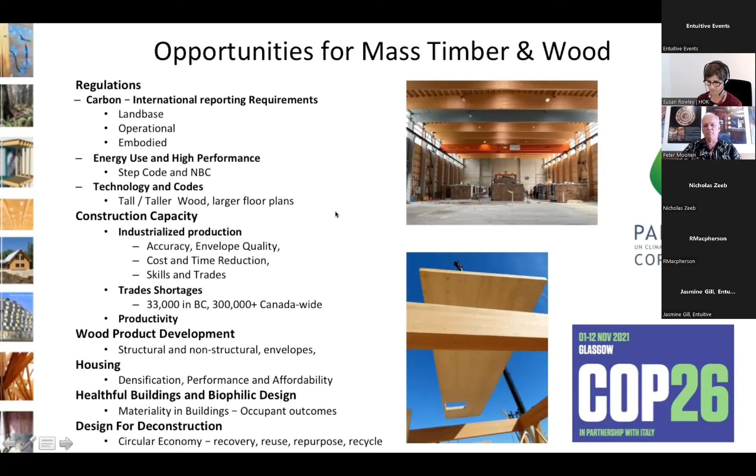One of the things that over the last several years we've been looking at is there's a tremendous amount of opportunity for wood use as codes change and as focuses on carbon change. And so these are some of the things that we regularly present on and work on. For the purposes of this session, I'm really just going to focus on these ones here. So the carbon aspect, some energy use and high performance, design for deconstruction. There are labor issues, there are construction opportunities, there's technology and stuff, but because it's the Carbon Leadership Forum, I'm just going to focus on that.

The wood industry has traditional products like lumber that have been around for generations. They're often used in single-family homes. I think more than 90% of all the single-family homes in Canada are built with these traditional products of lumber, plywood, OSB. However, some of these products have been advanced so that the codes have changed to allow them to be used in other buildings. And I'm thinking of things like mid-rise construction, where you can have light wood frame up to 6 stories across the country in the National Building Code.

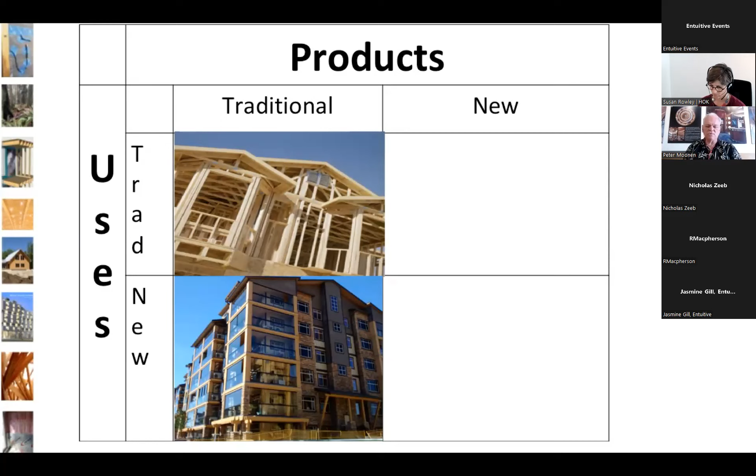The National Building Code, and we'll get into this a bit later, is changing to allow encapsulated mass timber construction, but these traditional products that we have, the light frame structures, can be used in buildings up to 6 stories and can be used for tall wall systems. They can be used in offices, schools, that sort of thing. But there are some new products. CLT is one of those. I'll get into what the mass timber products are, but CLT is one of them.

And they can be used in traditional buildings like this office building, which happens to be the building I'm in right now, a 2-story office building, similar to a lot of those medical buildings and small service buildings, mercantile on the bottom, offices above. And then there's some new products. This particular one shown there is wood fiber insulation.

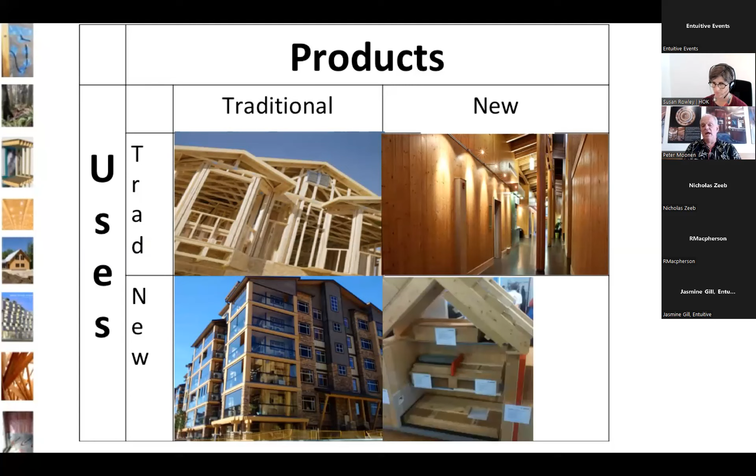And these new products can be used, as I say, in traditional buildings, as well as new construction and new technologies. This is the Origine building in Quebec City, and this is the building completed. And it's an all mass timber structure. So there are opportunities for these different products, as we will see.

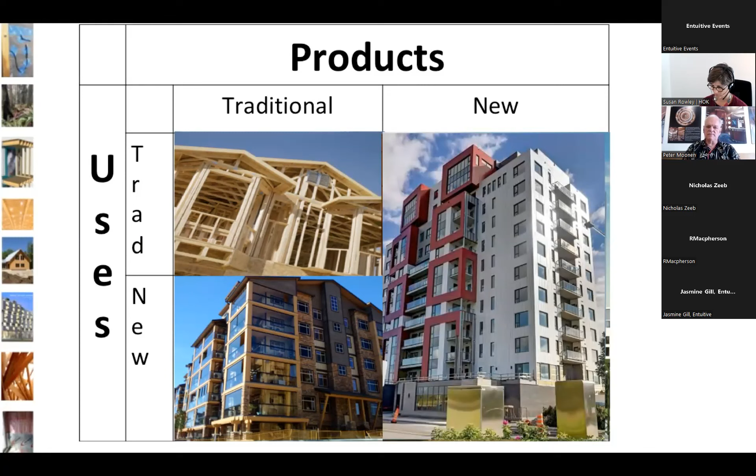So typically, the heavy timber or the mass timber has been raw lumber, not using glue. These are the hammer beam design in a cathedral, several hundred years old in Europe. But the pictures on either side are from buildings that are old, but heavy timber and mass timber. The one on the right, for those of you who ever get out to Vancouver, there's a pub called the Gastown Steamworks in the Landing.

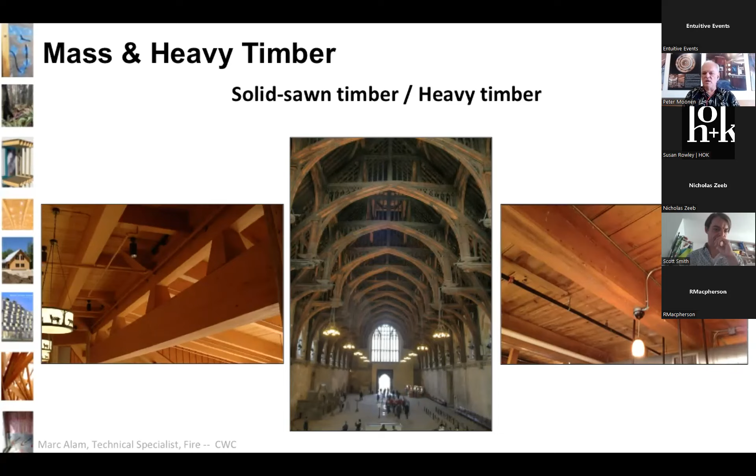It's a 9-story building that is actually closer to 11 stories in height, but it was made with heavy timber, solid Douglas fir columns, and that nail laminated timber deck. So we've been resurrecting the fact that we forgot that we knew how to build tall wood buildings using heavy and mass timber. So I just showed you some nail laminated timber. I'm just going to go through these quickly.

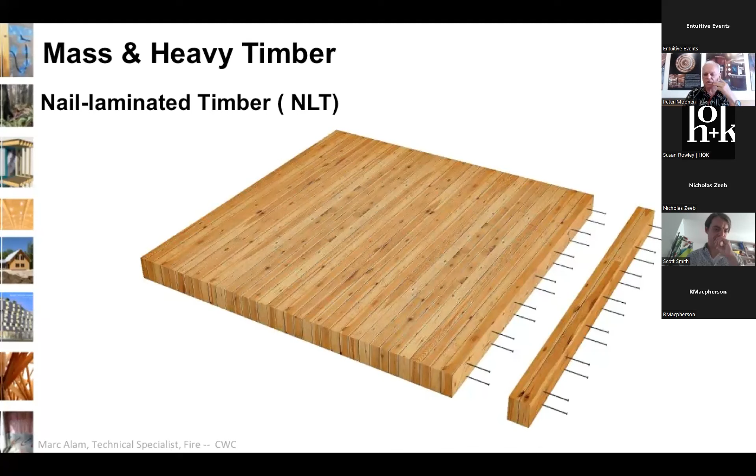The nail laminated timber is simply dimension lumber that is nailed together with nails that go through 2.5 of the members, so that they provide support in one direction. So if it's a span or a single directional cantilever, this is a very cost-effective way to do it. It's simple. Oftentimes it can be built on site. Other times it's manufactured off-site, delivered.

Glue laminated timber, I'm pretty sure everyone's familiar with that. It is using chemical means to fasten the members. It's a very efficient use of wood. And consider that these glulams here would probably be 3 or 4 lamella thicker if it was a solid wood beam. And that's because these little defects here, these knots and stuff, are offset by wood on either side of that particular lamella. So from an environmental perspective, you're getting greater efficiency of smaller trees.

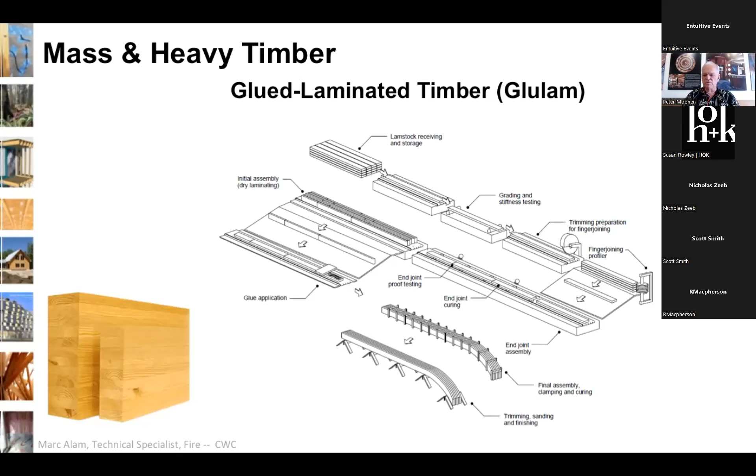You're able to use smaller members and build that up into a heavy timber structural product that is consistent in strength and consistent in cost and dimension, and it's a much more stable product. So dimensional glulam timbers have been used for 70, 80 years.

Laminated veneer lumber, this one is using the same veneers as are used for plywood. It's a peeled process. The veneers are about 1/8 of an inch thick, and then the resin is a phenol resorcinol resin that does not off-gas. A general rule of thumb for off-gassing, if you're concerned about that, is if it's a structural veneer used, it must be waterproof, and it must be structural from the minute it leaves the plant. So in these products the glue is inert, does not off-gas, there's no chemical changes. That's just a rule of thumb.

Laminated veneer lumber is not an extruded product per se, but it's made in a continuous sheet, can be purchased in lengths up to 64 feet long, which is the maximum length on some of the trucks, but it's typically sold in narrower bits and is used for headers. It can be used for columns and beams. It's a very efficient use, again, of wood, which reduces the overall impact because you get higher utility.

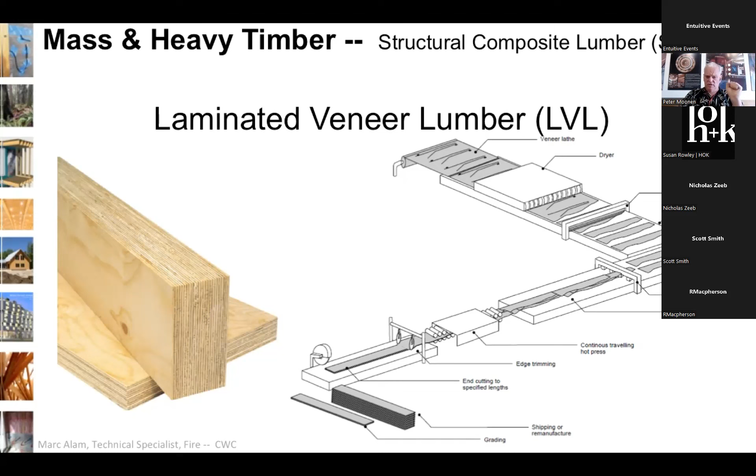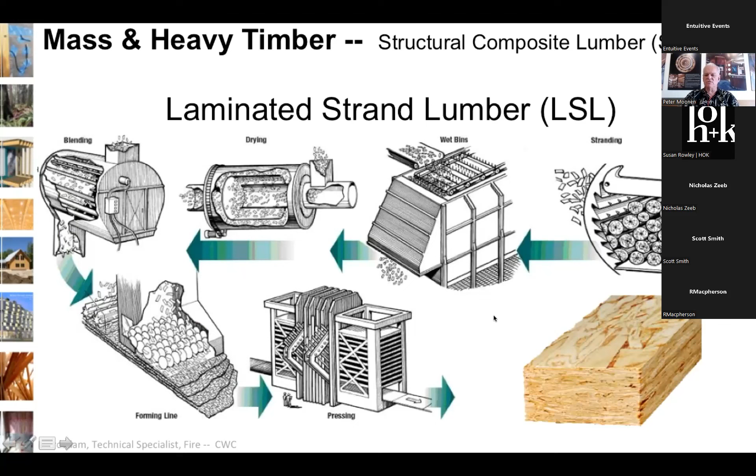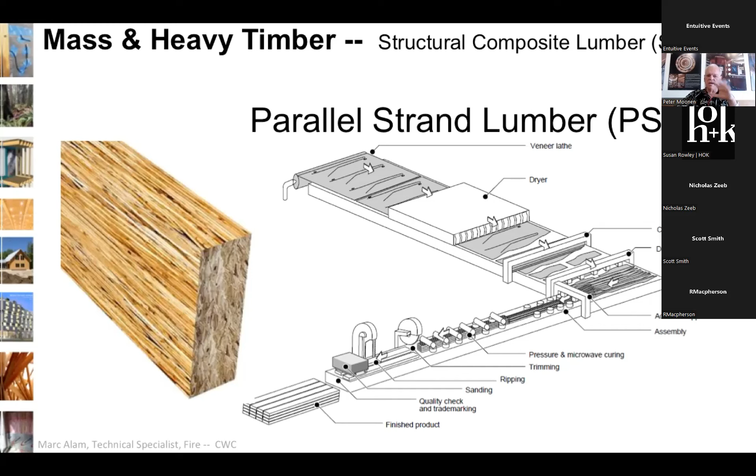It is used as a column or a beam, and it's the strongest engineered wood product we currently have in the world. It's about 6 times as strong, but rated at about 3 times as strong as a solid lumber component. A couple of others that are new to the market: dowel laminated timber.

Instead of using nails, which would hamper post-installation modification, or glue, which requires curing time, it uses wood dowels. The wood is laid up just like a nail laminated timber, pressed, and then holes are drilled, and dowels that are a little bit bigger than the hole are pressed in place, and it locks the timber in place. The nice thing is, because these dowels are just every few centimeters, you can machine doors and window openings without worrying about hitting nails.

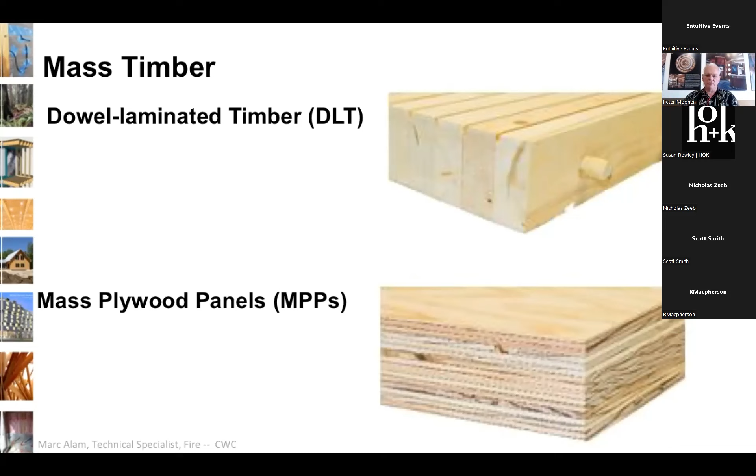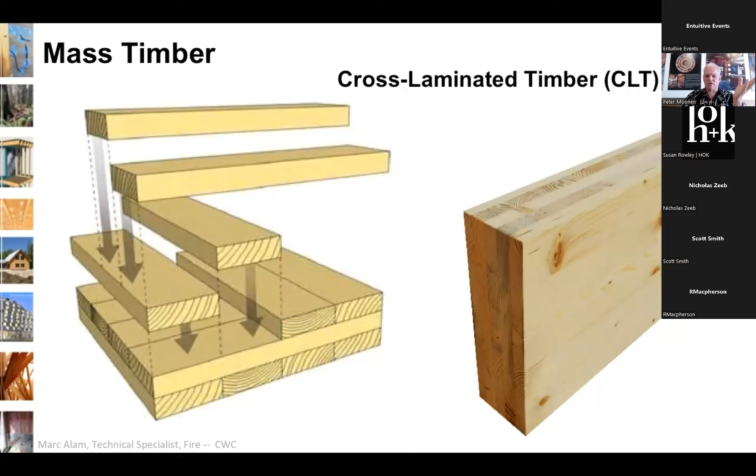And another product that is not made in Canada but is available in Canada are mass plywood panels, where they use 3/4 inch or 1 inch plywood. They build those sheets up to create a very strong and very durable mass plywood product. And the one that seems to be garnering a lot of attention these days, cross-laminated timber. I'm going to leave that to Corey. Corey, you can explain that process. I'm not going to get into that because we've got an expert on the presentation.

So, what are some of the considerations around forests and carbon and wood? Well, I'll take you through these, and then we'll discuss them as I go through. First of all, there's forests. We have logging operations. There's concern around harvest levels, and there's also what happens on the land base after the harvest. Do emissions increase? Does the land get replenished? These are all concerns that people have, and for the most part, once you do the research, you realize that there are impacts, but these are being addressed. For example, in Canada, most of the wood is owned by Canadians. So these are some of the issues around forests.

There's also embodied carbon. What goes into making the products that we use? How much energy, how much carbon? This is all being addressed through life cycle analysis, and it's something that you as carbon leaders recognize is an important part of our considerations, that we can't just ignore what goes into the building. We have to focus on that as well as the operational performance.

Biogenic and stored carbon. This is a bit of a wild card in that wood is a biogenic material. It comes from nature, and it's going to go back to nature. The certainty of that is we know that it's going to go back, but we don't know when. So if it went back to nature the day after we used it, it would have 0 carbon benefit. If it goes back in 100 years, that's deemed basically to be permanent carbon, and we would get 100% credit. So we'll talk a little bit about that. If you've got any questions, perhaps I can answer them.

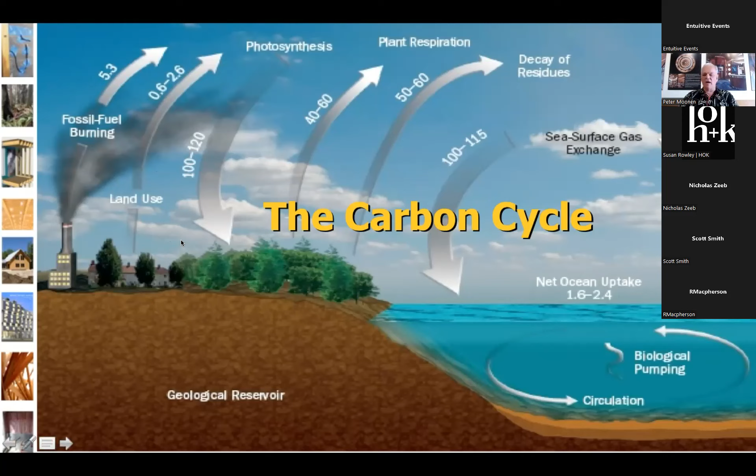So I'm pretty sure most of you have seen something like this, the carbon cycle. Humans, nature, whether it's wildfires, disease, decay, landslides, hurricanes, affect what happens on land and put carbon back into the atmosphere, and then forests and land and ocean take it back out. So the concern that most of us are facing is not part of the cycle that we had, and we're adding carbon into the atmosphere. How do we address that?

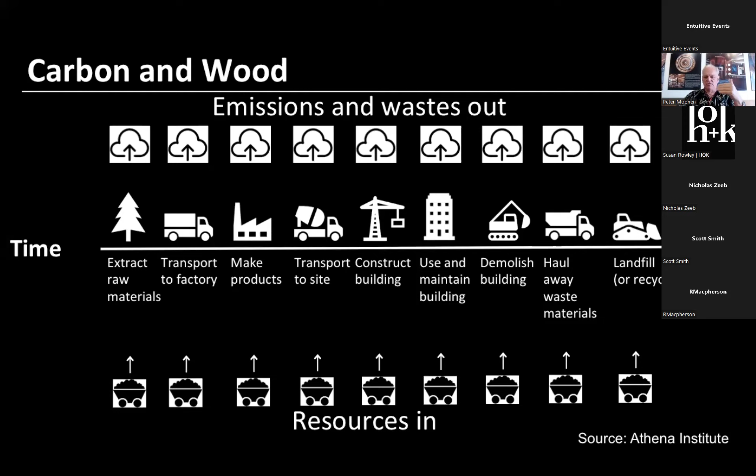So again, for those of you who are doing LCA, you're familiar with the A1 to A4 elements of life cycle analysis, looking at inputs, looking at outputs, looking at residues or waste. Where do they go? How do they get used? And what's the impact? The wood sector that I deal with is looking at the extraction and transport and manufacturing of products. That's the embodied impact. We don't get involved so much on transport to site. That's going to vary with location.

It's going to vary with product. It's usually by truck or rail. We also don't necessarily get involved in the construction process, but we work with architects and engineers to create some efficiencies and value engineering of products and use of those products. So there's a carbon impact to value engineering, if we don't have to use stuff that is either high carbon or as much of a material.

And I'll give you an example, and Nick, no disrespect, if someone is looking at the impact of building a light frame home or a CLT home, the CLT home will sequester more carbon, but has a higher embodied impact. So we have to balance what is the ultimate impact that we want to achieve or want to reduce, and pick our materials accordingly. And this is within material silos like wood, and also across material silos like stone and masonry, wood, steel, and concrete.

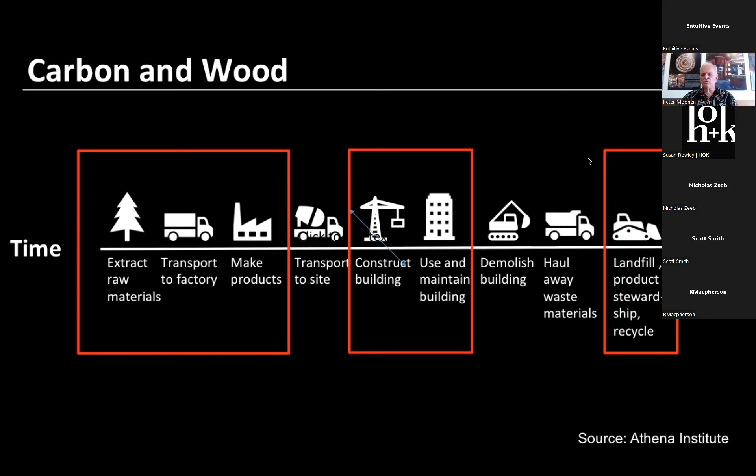So the wood industry doesn't get involved in demolishing buildings per se, although there are some codes and standards we've been working on for designing for deconstruction. We'll get into that later. And then at the end of the day, what happens to that product when we no longer have a use for it? We've fully recycled, we've recovered, we've reused, and it ends up going to the landfill. So we have to address those. Those are the areas in the red rectangles that we deal with.

One of the programs that I'm overseeing for the wood industry is the National Research Council Low Carbon Assets Life Cycle Analysis project. And what we're doing is gathering information from all the sawmills, plywood plants, OSB plants, mass timber producers, to provide the National Research Council with a life cycle inventory database. It's very comprehensive, it's very complex, it's going to take some time. We hope to have it all done by the end of March.

NRC, or National Research Council, has provided support to the concrete industry as well, and then they approached us. We'd like to get this information from the wood sector. So we'll be gathering this embodied impact information, the first parts of that, so that designers and procurement people within government are going to be using this to add to their decision-making process. So this is a procurement strategy by the federal government that is likely to be used by the provincial and municipal governments as well.

So that's this extracting raw materials, transport, and making products. That's what the LCA squared is, and we hope to have that data. It will be available to any designer. So if you're a designer, an architect, engineer, or a contractor, and you want to say, I want to find out the material choices between, say, a truss or an I-joist or a built-up mass timber, you'll be able to calculate those embodied impacts.

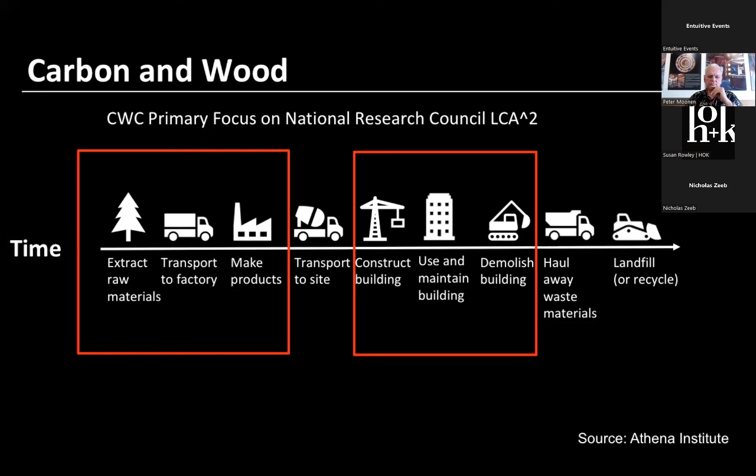So forests, it all starts with forests, and you've probably heard of sink, sequester, and substitute. It actually starts with sustainable forestry. And I think that's really important because in Canada, most of our forests are owned by Canadians. 93% is owned by us, not by companies. In fact, we also have a very high level of certification. Canada's certification is about the equivalent of the next 8 countries or 7 countries combined.

So the vast majority of our forests, and our forests account for about 400 million hectares in the country. 300 million could produce wood, and about half of that is certified. 164 million hectares are certified under one of 3 different systems.

Another thing that's going on is the National Research Council and Canadian Forest Service are looking at forest management and how that can be used to mitigate climate change, which is basically pulling carbon out. So they looked at a whole bunch of different methodologies. They looked at bioenergy. If we convert to bioenergy, what does that do? We looked at longer lived wood products. We looked at harvesting less or better utilization. I talked about taking small trees and making glulam.

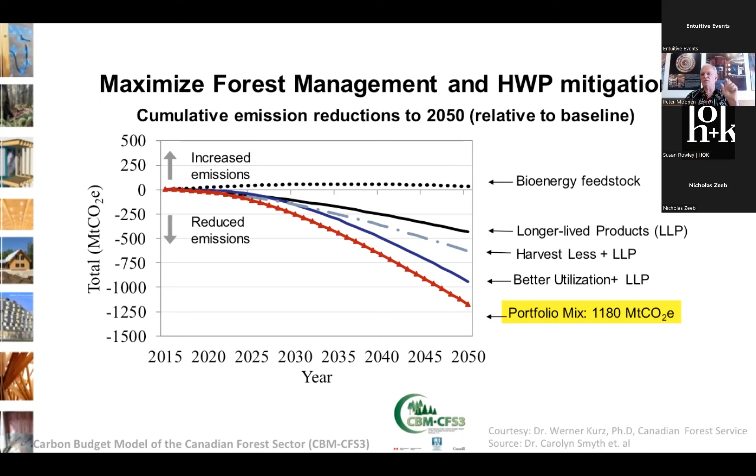And what they found is that there's no silver bullet, there's silver buckshot. So we have to do a little bit of everything if we want to optimize the carbon benefit from our forests. So there are people who say we have to use wood for everything. There's others who say let's just convert fossil fuels. Others say let's just lock up our forests and do something else. When you look in balance at what is best from carbon, it's a mix. It's conservation, it's utilization, it's better management, and it's also using wood in longer lived buildings.

When we look at the forest carbon, typically a forest will achieve a stasis where in some of the very old forests, they're losing as much carbon as they are absorbing. So you get to a net zero. It's a carbon stasis, and over time that remains static. There are some big trees that hold a lot of carbon, but a lot of trees that stored carbon have also died. So there you get the stasis.

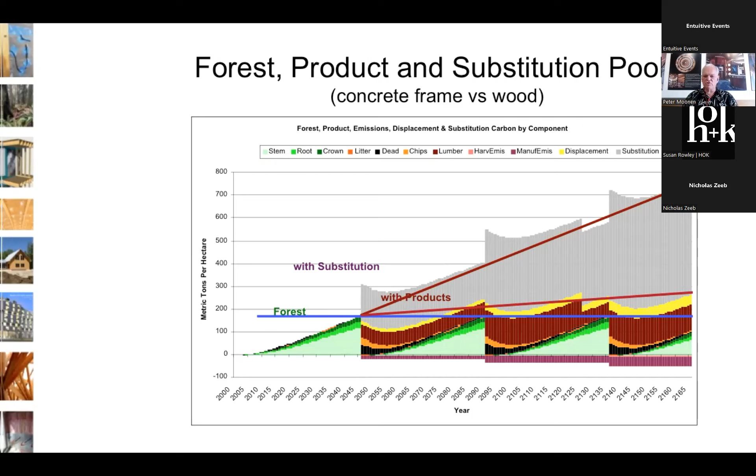When you take some of that and you lock it up into longer lived buildings and structures, you're actually able to store that. So you're getting a little incremental benefit. But also, if you use it then to substitute where you can for other products, then you get the displacement of those emissions. Now, I want to say there's no perfect material. Steel rusts, concrete spalls, wood burns. But what we as users and designers have to do is understand how do we integrate these products to better reflect what we want to achieve in cost, in function, in beauty, in performance, and embodied impact.

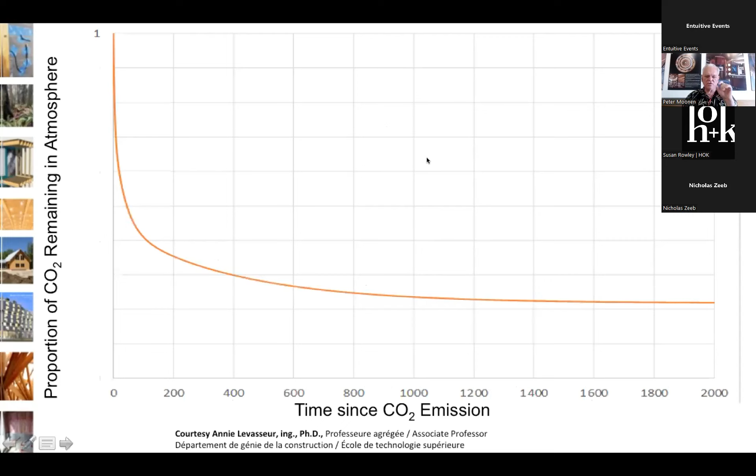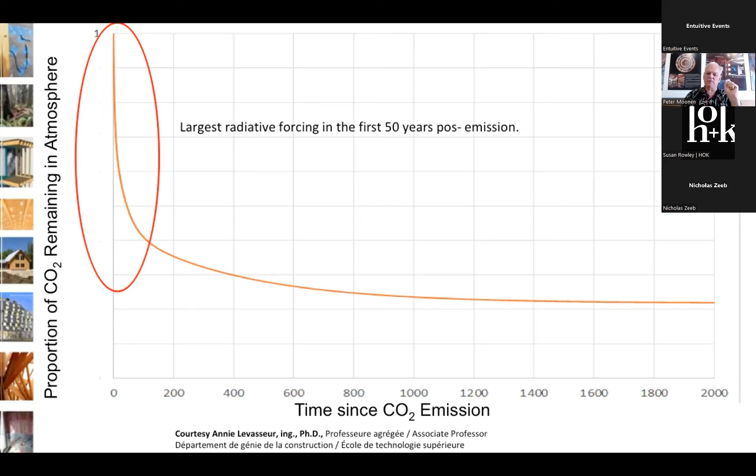Time is a very important factor when you're considering carbon. If you look at this chart, this is showing the radiative forcing of a CO2 emission. The largest radiative forcing is in the first 50 years post emission. So that means that if we can delay those emissions to a time perhaps when we're better able to adapt or find ways to mitigate, we have to understand that. So when you emit is important. In fact, if you avoid a ton of carbon today, you don't have to avoid over 4 tons of carbon in 80 years. That's the cumulative benefit of an avoided emission.

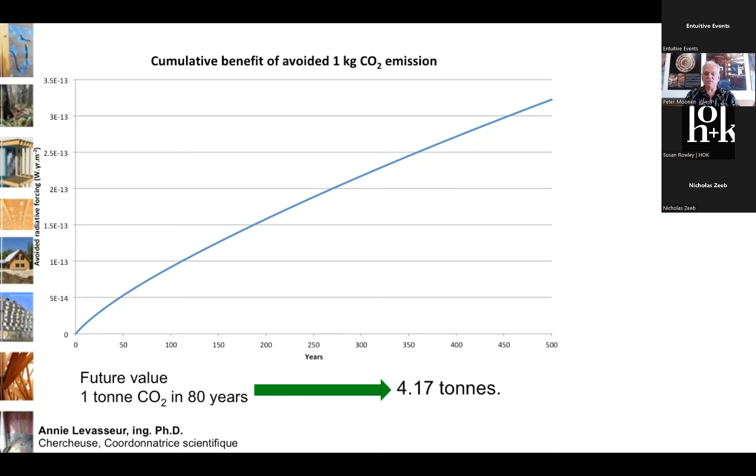So there's justification for including the sequestered carbon in a building. And the longer that building retains its carbon, the greater the benefit over time. But as I said, if you build a building and it gets destroyed the next day, all of your embodied impacts have still occurred. Likewise, since materials do go back to the atmosphere, it's not a 100% permanent storage. So the carbon benefit of sequestered carbon is somewhere between 0 and 100%. That may seem glib, but that's what we have to figure out.

At the end of the day, though, the IPCC has recommended that we need to use our forests, use wood from sustainable forests and use them in longer lived products. And that will generate the largest sustained mitigation benefit. And this was validated again in 2013 and 2019.

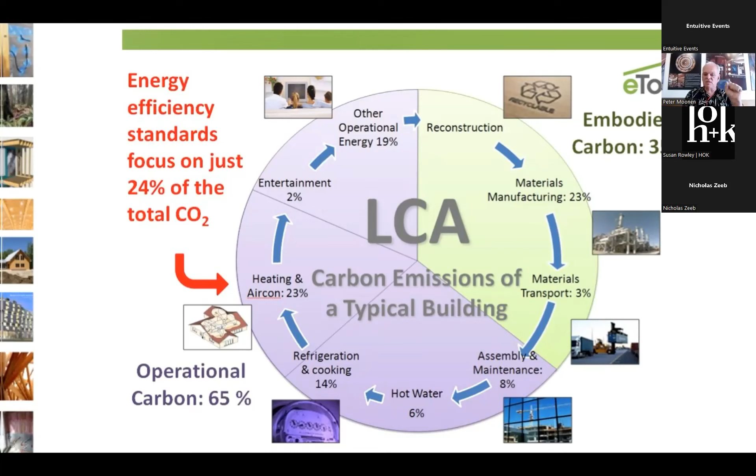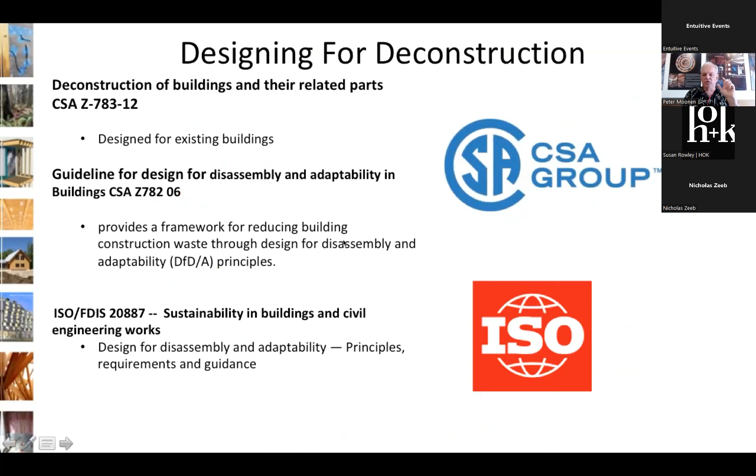When it comes to extending the life of carbon in buildings, we need to design for deconstruction. We can't just get tired of a building and knock it down and try to salvage what we knock down. So there are some codes and standards that we have been working on at CWC for disassembly and adaptability, for deconstruction. We need to shift our thinking to designing for the future and future reuse, not just the first time single use. And there's a lot of benefits to that.

There are carbon benefits, there are cost benefits, there's landfill benefits. We've got local economy because it's always going to be deconstructed by local people. So I think if we can start to pay attention to designing buildings so that they can be deconstructed, then we're going to be better able to fulfill some of our aspirations around circular economy as well. The circular economy...

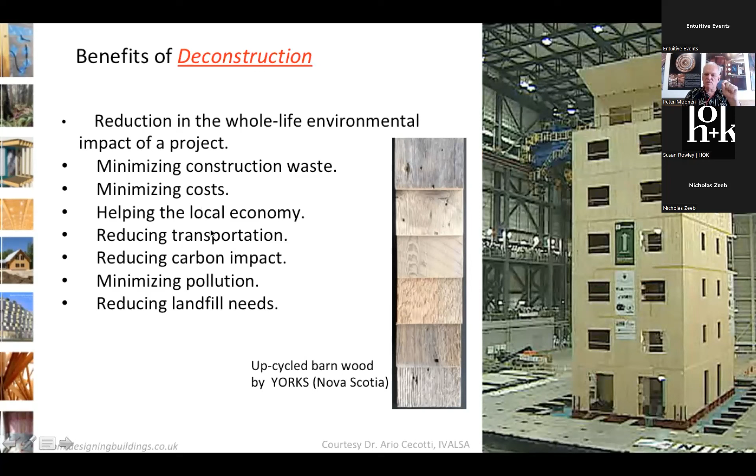...just the material itself. The other thing we need to do is we need to design and build buildings that will last. And one of the best ways to do that is to make a building that people love. Wood is often criticized: oh, it rots, it burns, it's not very strong. Well, that's our fault. If we design something so that it will fail, it will fail. We need to understand that materials don't fail people, people fail materials.

And if we design a building that is adaptable, flexible, enduring, can be maintained, is resilient, and can withstand the environment in which it is built, we're having a long-term carbon impact. And I think that's a shift. We can't let our egos or our economies drive just the carbon decisions.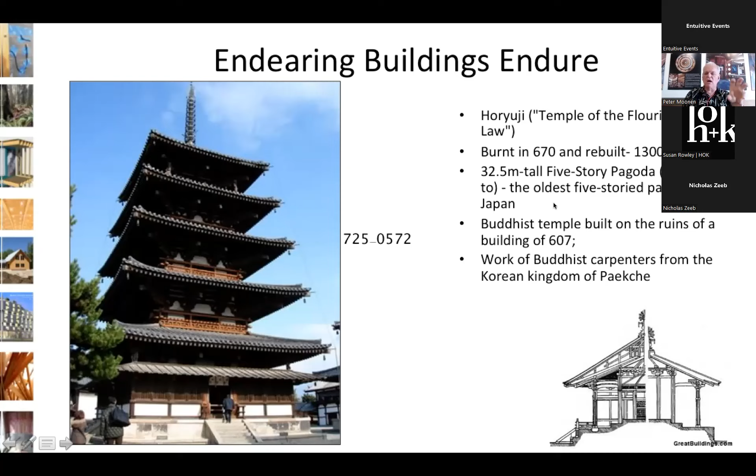I'm often asked why we would build with wood. And I think, well, gee, we've got a product that's a carbon sink. They're renewable, recyclable, reusable, organic. The forests clean the air and provide habitat, recreation, oxygen. It's all of these good features. So the question I would ask is not why wood, but perhaps if not wood, what?

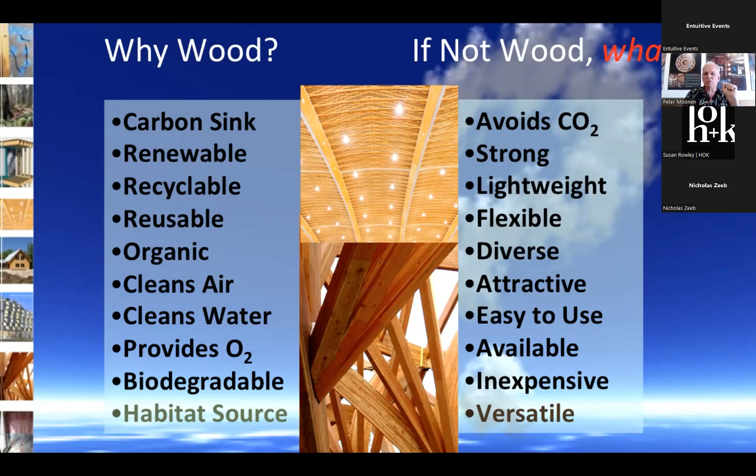If we're going to build, can we increase the amount of wood we use to fulfill what we want for that building? It doesn't mean that you're building a building only of wood. And there's a picture in Nick's presentation that has an igloo. That's the only building I can think of in Canada that's built with a single material. All the rest use more than one.

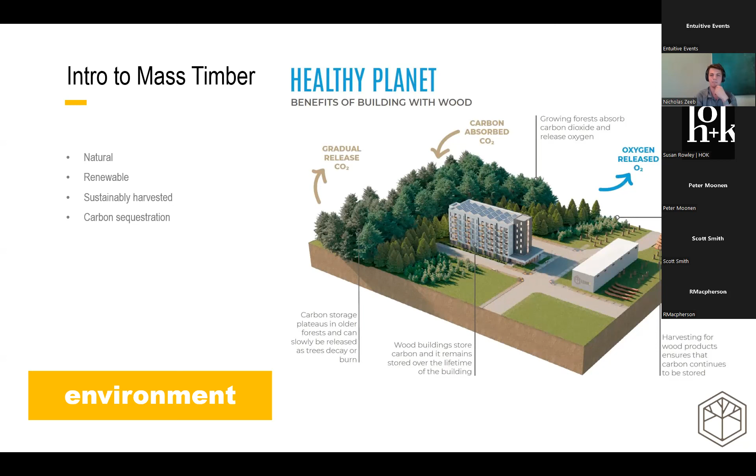The benefit of this process is that the carbon footprint of mass timber is often much lower than a concrete or steel alternative. Finally, it should be noted that the carbon from the trees is stored in the building for the life of the structure, again, something that Peter discussed in depth in his presentation. However, it's important to consider the strategy of what we're going to do with that wood after the building life cycle has been completed, so we can keep those carbon emissions out of the atmosphere as long as possible.

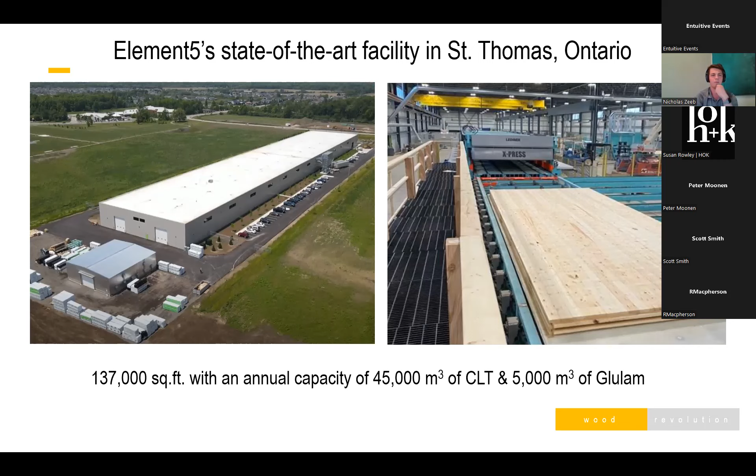We have an image here of Element5's state-of-the-art facility in St. Thomas, Ontario. It's a big box building that's about 137,000 square feet with an annual production capacity of 45,000 cubic meters of CLT and 5,000 cubic meters of glulam. We're PRG 320 certified, and we were in full production starting April 1st. The image on the right was the first panel that came off our line in December of 2020, and they've been rolling off the line like hotcakes ever since. Our wood is sourced from Ontario forests, and that wood is FSC certified.

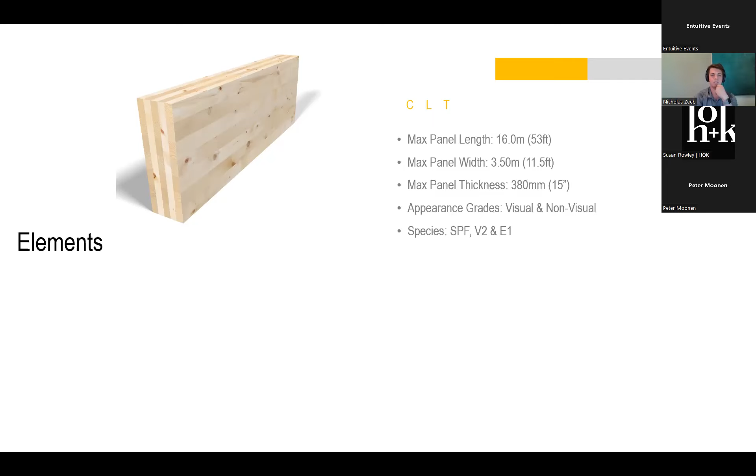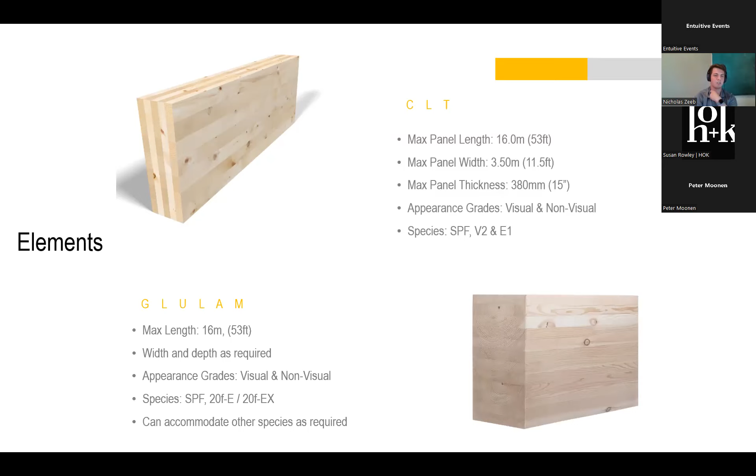So I'm going to do a quick rundown of the elements that we produce. I already mentioned that we make CLT. The maximum size of CLT panel we can make is 16 meters by 3.5 meters. That's some of the largest mass timber panels that can be produced in North America. We produce the species grade spruce pine fir, at a V2 or an E1 grade. We also produce glulam, with a max beam length of 16 meters. The width and depth are as required for the project, and the species that we manufacture is SPF, 20FE, and 20FEX.

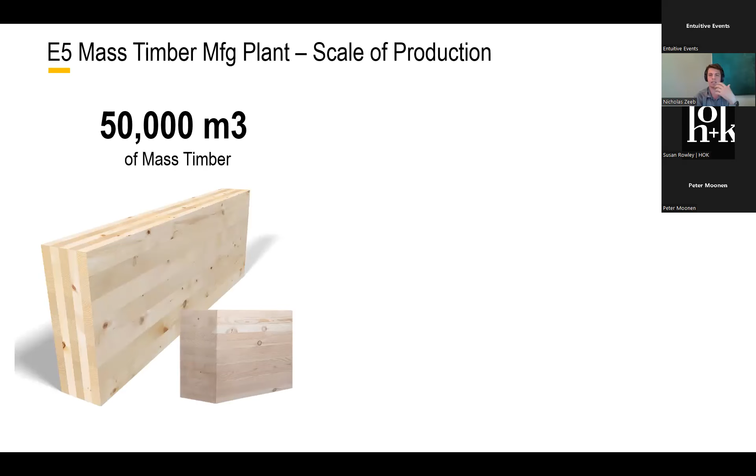So now I'm going to dive into a little bit about the scale of production specifically for Element 5. So I mentioned some numbers earlier that I think require some additional context. If we take our annual production capacity of 45,000 cubic meters of CLT and 5,000 cubic meters of glulam, that adds up to 50,000 cubic meters of mass timber production out of our St. Thomas facility annually. Now, when I first heard that number, it was hard to understand what that meant in terms of actual construction. So that is roughly equivalent to 22 Brock Commons buildings produced annually.

Of course, this got me very excited the first time I heard it. That's a lot of mass timber that can be built. And I really saw the potential for what Element 5 could do for the mass timber industry in Ontario. But before we get too excited, I want to zoom out a little bit and really consider what 22 Brock Commons buildings really sounds like at the end of the day.

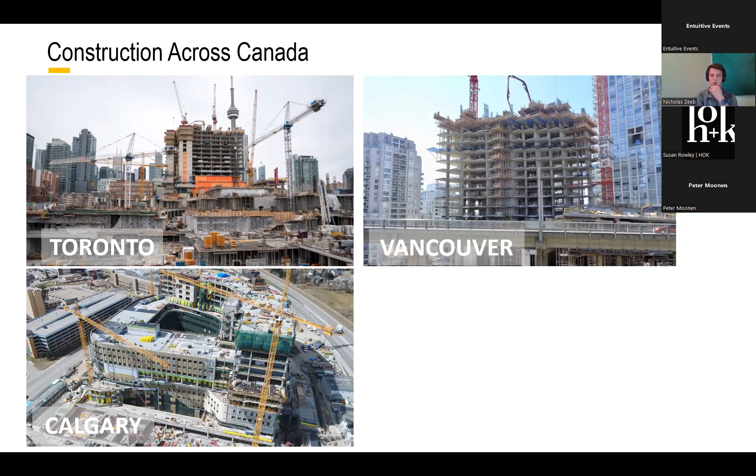I'm assuming a lot of people on this call, we're doing this for the CLF Toronto chapter. I'm assuming that most of you are in Toronto, but I'm sure everyone is well aware of the immense construction going on across Canada. So, quick Google search got some images of various construction projects going across Canada, Toronto, Vancouver, Calgary. And as can be clearly seen, we're really pushing forward with urban development, with concrete and steel clearly being the material of choice.

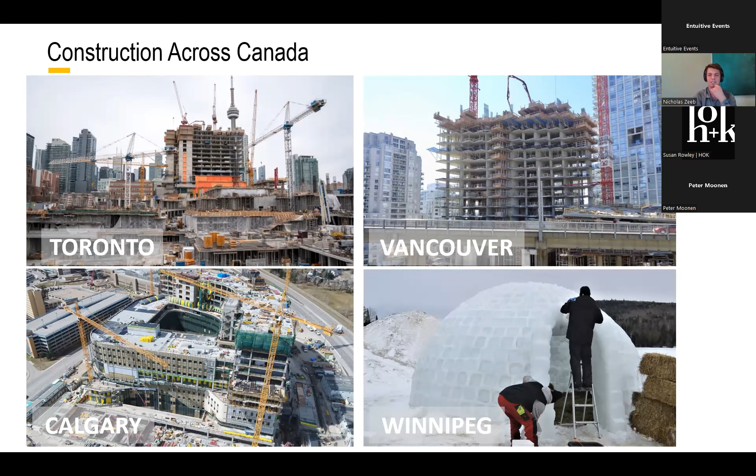The only major city I could find committing to sustainable construction was Winnipeg, continuing to harvest building materials from the frozen tundra. It's important to realize, though, that even Winnipeg will not be able to follow through with sustainable construction once climate change kicks in and starts to impact their ice reserves.

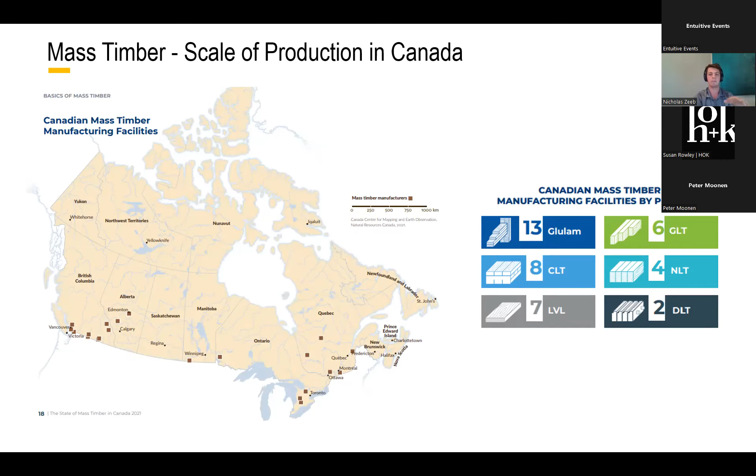All kidding aside, mass timber production in Canada, of course, is growing. If we look at this map from NRCan, there's clearly lots of growth in the industry, with most of the competition existing in glulam and CLT. And it's exciting to see that there's so many manufacturers across Canada. But again, I do want to take a step back and really understand what this scale means compared to our competition of steel and concrete.

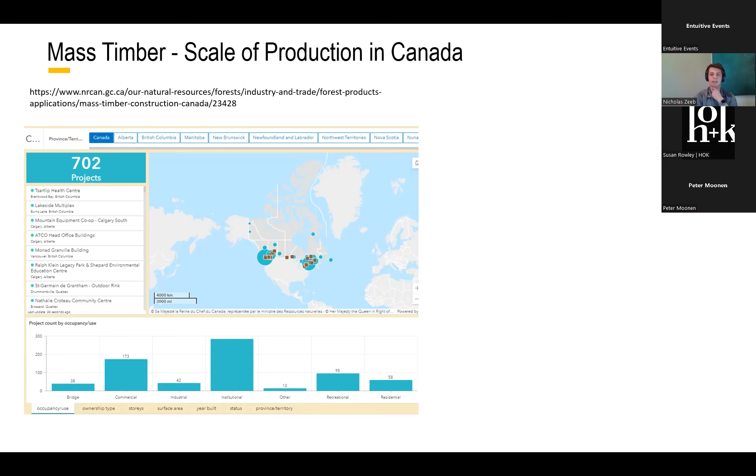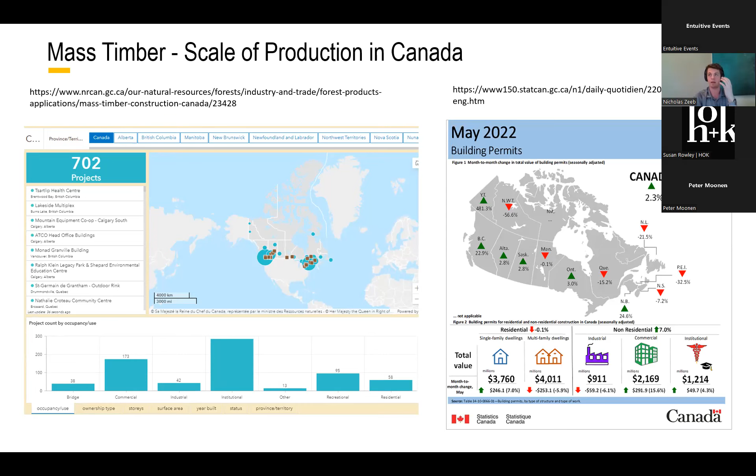However, if we look at the value of building permits across the country in May of 2022 alone, there are billions of dollars of construction happening across the country. 700 new projects, while a great amount of growth for the mass timber industry, is ultimately a drop in the bucket. Now, if we can take this even just one step further and look at the scale of production globally, by 2025, it's anticipated that the global production capacity for CLT is somewhere between 2.5 and 2.8 million cubic meters of CLT.

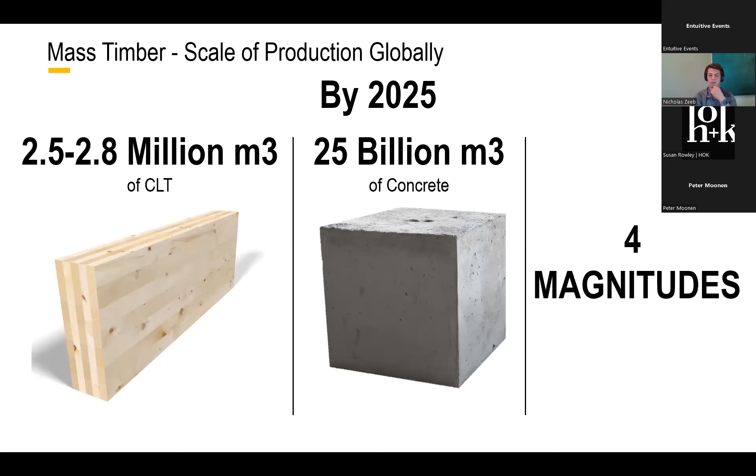If we compare that to concrete, though, it's expected by 2025 we'll have 25 billion cubic meters of concrete annual production capacity. I know we can't necessarily say that 1 cubic meter of concrete can be replaced by 1 cubic meter of CLT, but it is important to note here that that's a 4 orders of magnitude difference, which is quite a large way to go to be a truly competitive building material. And so if we consider the adoption of mass timber across Canada and effectively across the world as an S curve, we are very much likely still at or before the inflection point of major growth and adoption.

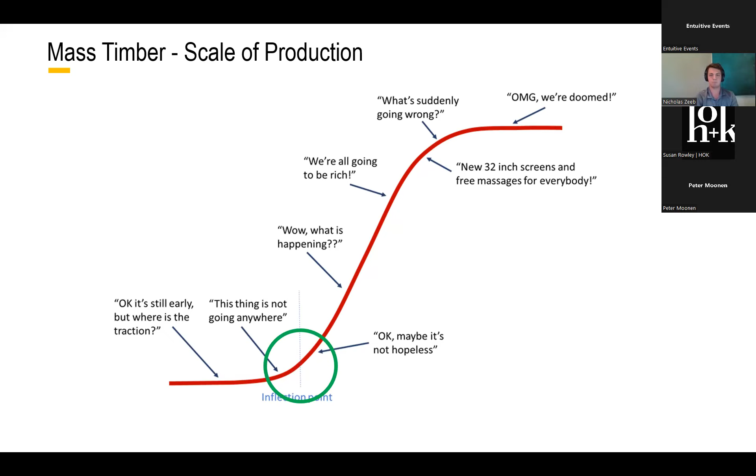Now, I bring all these points up not necessarily to bring doom and gloom and be nihilistic to these carbon discussions. In fact, I think that having this perspective is incredibly important to make sure that we focus the industry and help mass timber grow in the best way possible for what it's effectively able to be used for. So therefore, given that perspective, I want to point out some things that we need to consider.

While mass timber is a great solution to lower the embodied carbon in a structure, we simply cannot put all our eggs in that basket. Other solutions need to be explored, particularly for building typologies where mass timber is not practical, or there's heavy code limitations like for buildings over 12 to 18 stories.

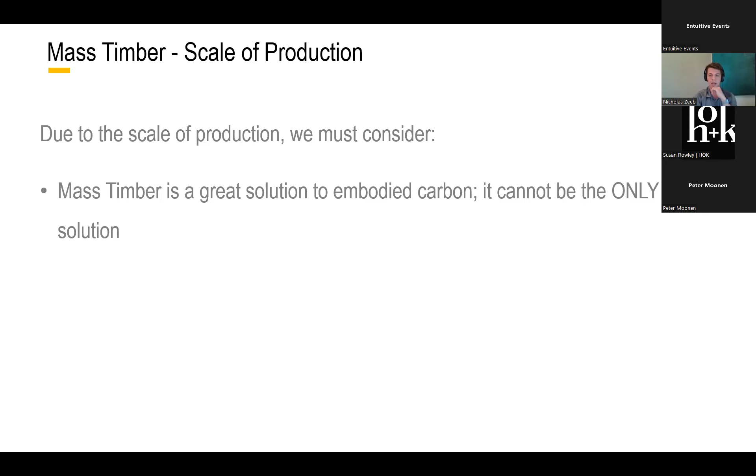The other point I want to make is that investment in mass timber buildings and mass timber production needs to happen across the value chain, still in droves, both from governments, owners, private developers, designers, engineers. All of us are required to keep accelerating the pace of mass timber industry so it can truly become more than a drop in the bucket.

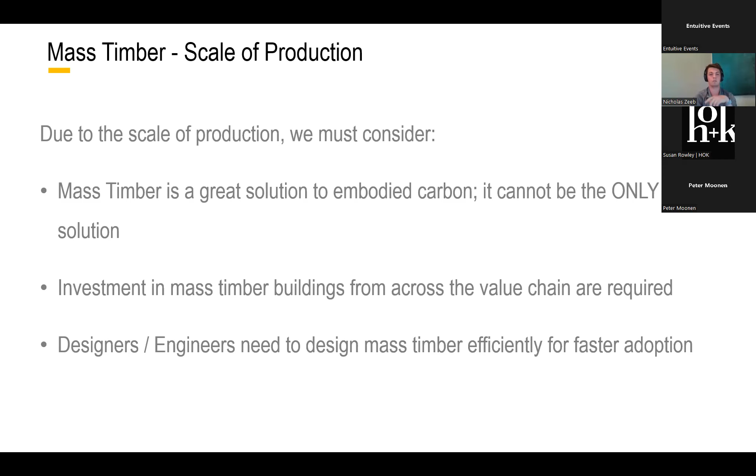And the last point I want to point out is that designers and engineers, in order to further push mass timber as an industry, need to clearly understand its limitations to ensure that the structure is designed efficiently to bring down both cost and also to bring down embodied carbon to encourage faster production.

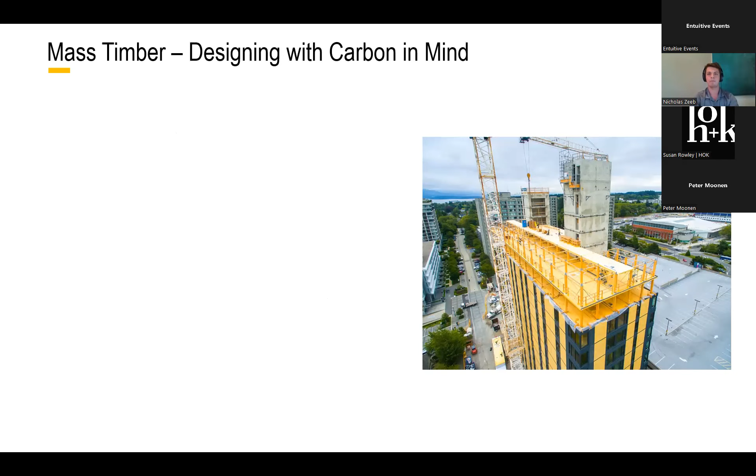Okay, so that brings us into the last segment of the presentation, designing with carbon in mind. And so where should we focus? There's a couple points that I want to bring up, specifically that the volume of wood in the final structure can be considered to be directly proportional to the embodied carbon and the cost of the building. And we're going to go through these points one by one in future slides.

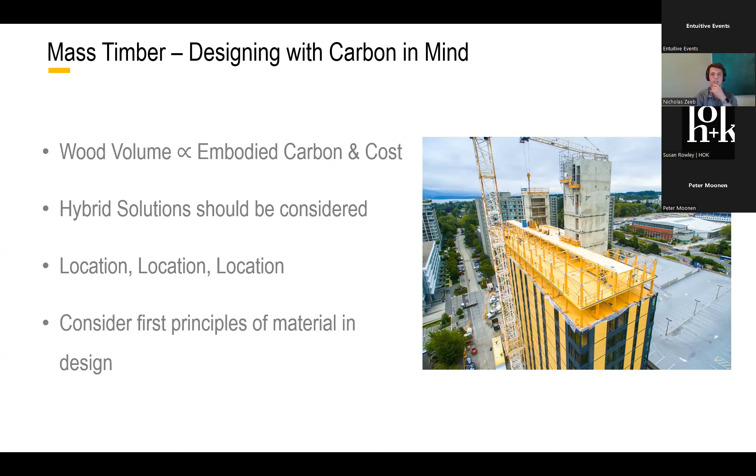The next point is that hybrid solutions should be considered wherever possible, where mass timber as a sole solution does not make practical sense. Peter did note that we typically don't discuss location in terms of the embodied carbon, but I'm going to. I think location is an important thing that we need to focus on when considering the output of carbon when building, specifically with mass timber. And then the last point we're going to discuss is the first principles of mass timber manufacturing and how that impacts construction.

So starting in that first point, where wood volume can be considered directly proportional to embodied carbon and cost, this is an example of the different layups that I pulled directly from Element 5 specifications. And I want to focus on the simple fact that CLT is generally comprised of a discrete number of odd layers, specifically 3, 5, 7, and 9 layers.

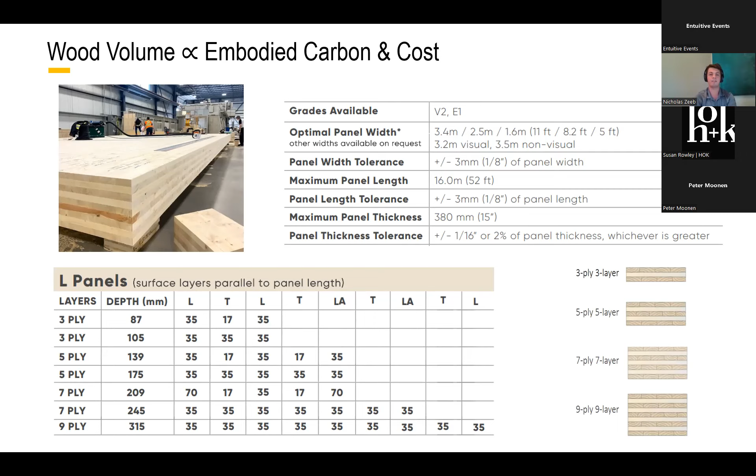I point this out because for that reason, CLT is unlike concrete, where it's not unheard of that if you are at your capacity limitation, you can just add additional rebar or increase your slab thickness by 10 millimeters to achieve those capacity requirements. With CLT, if you design a building that goes over the capacity limits of that panel thickness, you then have to consider potentially adding 2 additional layers of wood to meet your capacity requirements.

Let's go through an example of this with Element 5's span tables, which are provided on our website. So let's say we're in the first category of this table, designing a residential building with a 1.9 kPa live load. In this case, we're typically trying to make a 5-ply 175 panel work, which is our most cost-effective and relatively simple to design to. In this case, the panel is governed by vibration at just over 6.1 meters. If, unfortunately, the panel clear span goes beyond that span limitation, then we have to start considering design alternatives.

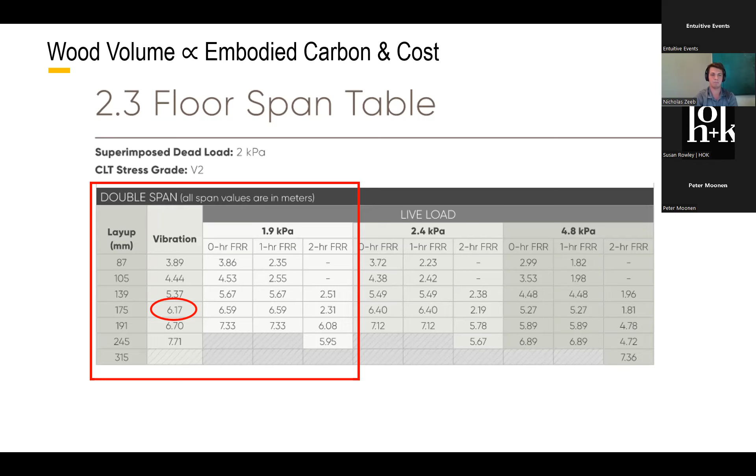The first thing that we're going to do is consider, can we go from a V2 grade panel, which is what this table is based on, to an E1 grade panel. That's the next strongest grade up. But if even going to the next grade doesn't get us the capacity that we're looking for, we then have to consider going to a 7-ply panel. We would typically recommend going to our thicker lamella counterpart for ease of manufacturing, which is the 245 panel.

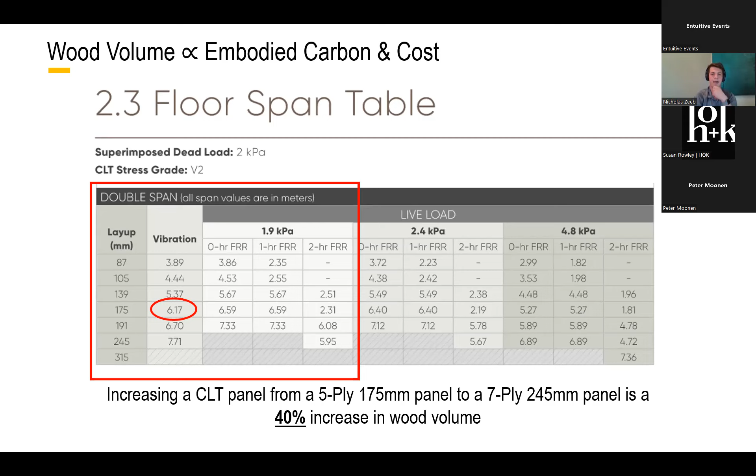So if all of that happened, then that means we started from a 5-ply 175 panel and increased it to a 7-ply 245, which represents a 40% volume increase, which is directly going to impact the cost of the structure as well as the embodied carbon for the structure.

The next point I want to discuss is the lateral system of a building. Here's an image from our YW affordable housing project in Kitchener-Waterloo. We're going to get into this project in more detail later on in the presentation. The lateral system of this building was built entirely out of CLT panels, using the demising walls and some of the hallway walls as lateral elements. This type of solution is really great for low-rise buildings, removing all structural concrete above the foundations.

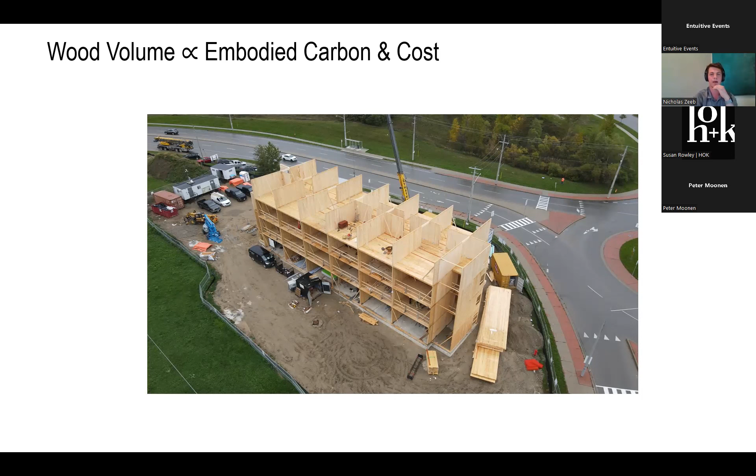However, we found, as we've been experimenting with this typology in a sense of scale, that this solution really works well up until about 6 stories. And this is a bit of a rule of thumb. It can be explored over that, but if you're above 6 stories, we might want to consider looking at other options.

Once we go above 6 stories, the number of walls required for the lateral system increases the costs of the building, increases the embodied carbon because there's more volume of wood, and makes the architectural layouts more difficult because we have so many walls to deal with. We recommend that above 6 stories you consider an alternative material for the lateral design, which can directly bring us into hybrid solutions. So again, any replacement of steel or concrete with mass timber will help with the embodied carbon of the building, assuming it's designed efficiently for mass timber.

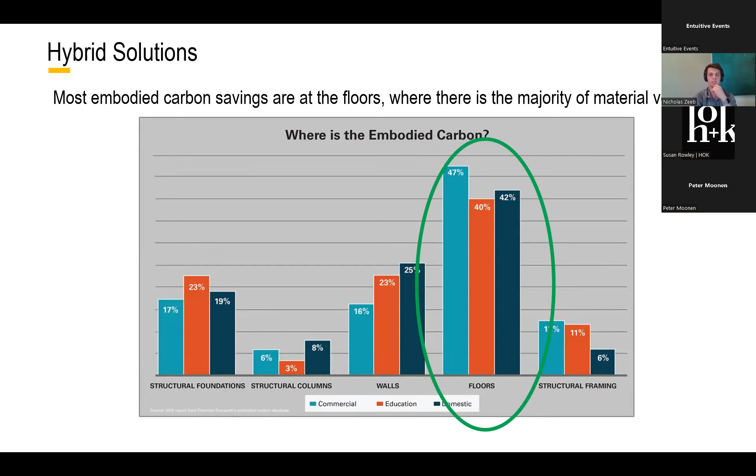This is a study done by Thornton Tomasetti that showed that for most of the buildings they were designing, the majority of their embodied carbon was found in their floor structure. So if a full mass timber solution isn't practical, finding a way to replace only the slabs with CLT floors can still have a major impact on the building's embodied carbon. So I'll give a couple examples of hybrid solutions that we might be familiar with here.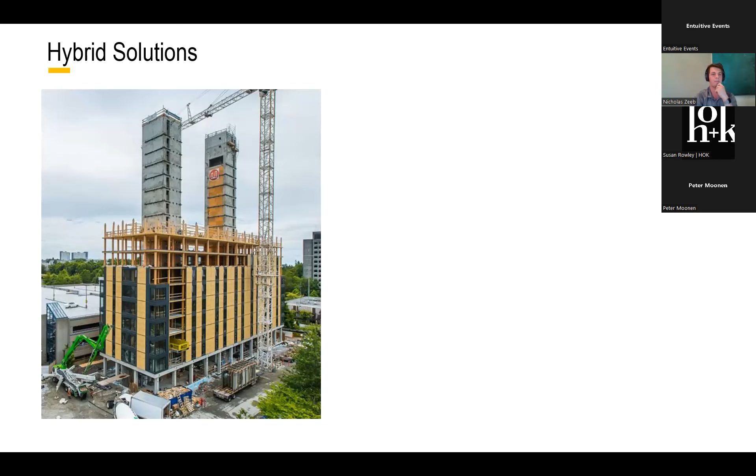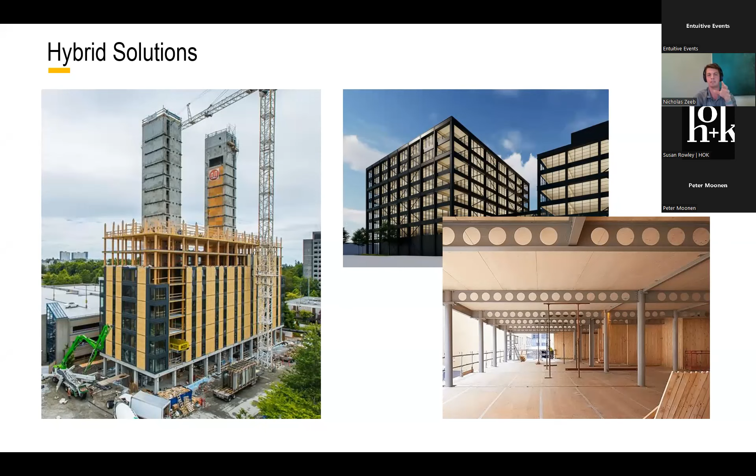The building we all know and love in Canada, Brock Commons, used concrete cores for its lateral system, while the framing and the floors were mass timber. T3 Sterling, going up in Toronto right now, is using steel braced frames for the building perimeter to resolve its lateral forces. And then finally, 6 Orsman Road in London, UK. I know this is outside of Canada, but it's a great example of where steel framing made the most sense for the project, yet we were still able to replace the floors with mass timber, helping the embodied carbon of that project.

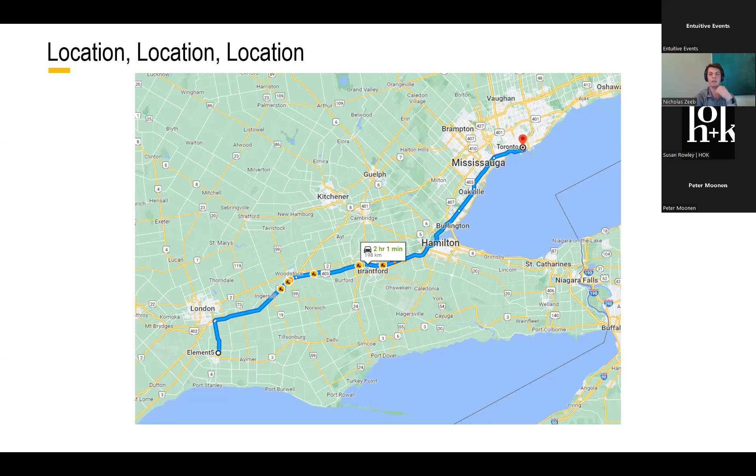Moving on to location. I do think it is important, considering where the mass timber industry is, specifically for CLT, glulam, NLT, as an industry in its infancy. Location does matter when considering embodied carbon. So if we look here, Element5's facility in St. Thomas is about a 2-hour drive outside of Toronto. Now, we're of course not the only player in Canada.

So if you're looking for other mass timber providers, I've got here the snippet from the NRCan map that I mentioned earlier. You can see with those brown wood-colored dots throughout the map that there are other mass timber suppliers, but they are located all over the country. So at that point, shipping mass timber potentially across the country is going to have a larger carbon footprint than ordering mass timber from a manufacturer that is closer to the construction site. So it's important to consider that, because unlike concrete, where there might be a ready-mix plant around the corner, that simply is not the case with the mass timber industry at its current stage.

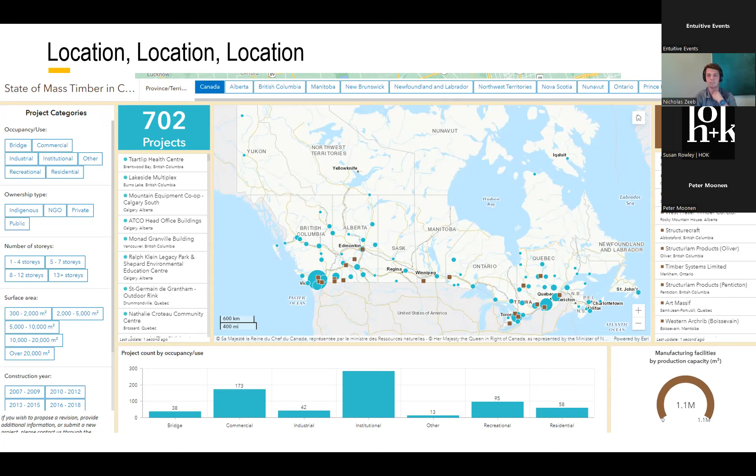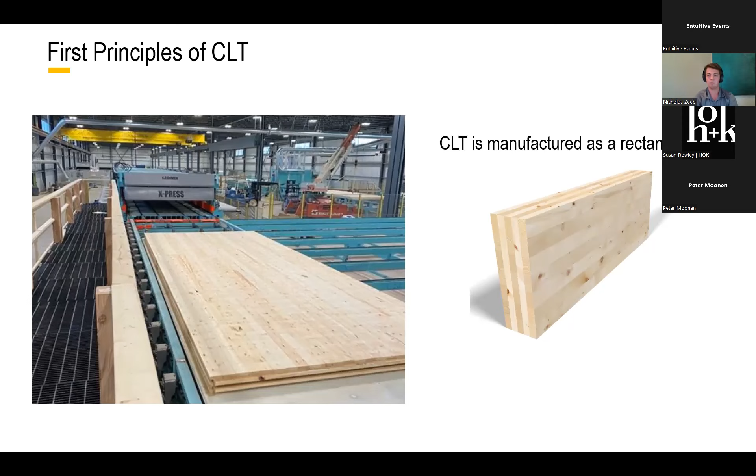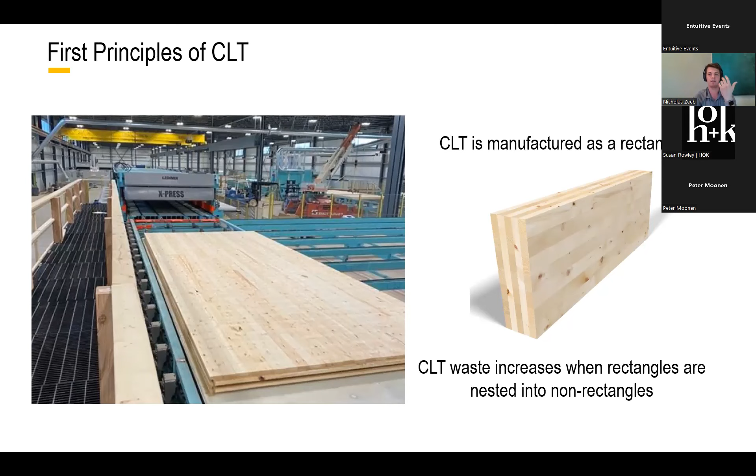And lastly, I'm going to touch on the first principles of CLT production. So again, I'm going to show that image of the CLT panel coming out of our X-Press in the factory. There's a very basic and important point I want to make about CLT production. CLT is manufactured as a rectangle. We are very good at making rectangles as shapes go. It's my favorite shape. Now, a surprising amount of my job is actually figuring out how to fit rectangles into shapes that are not rectangles. And the embodied carbon of a structure can increase because of the waste from those offcuts to make those shapes fit. So let me jump into a couple of examples here.

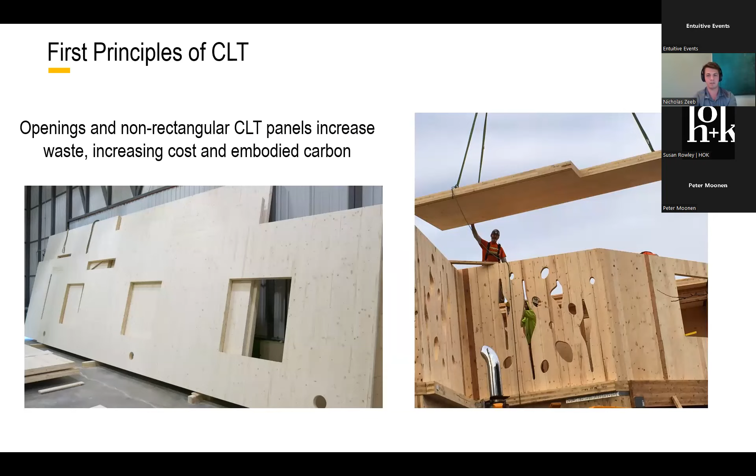Again, a rectangular panel had to be manufactured to make that panel. So that negative space that's no longer there is contributing to both the cost of the building and the embodied carbon of the building, but it's not having a positive impact on the actual floor area. So again, something to consider with construction.

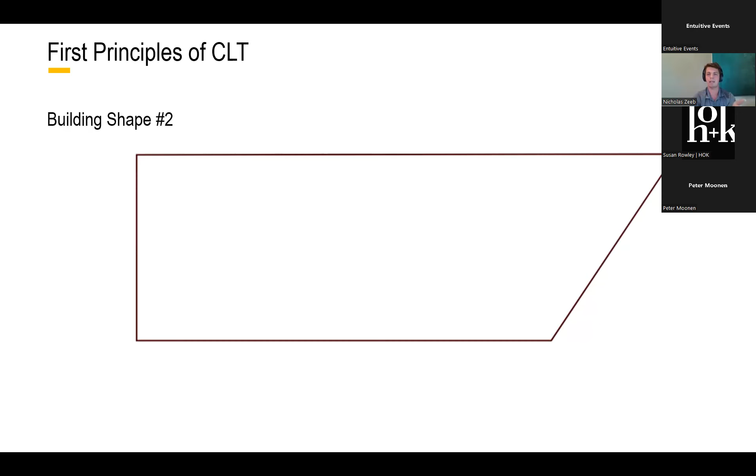But now let's consider a second building shape where we have a potential angle here. And again, not to say that we can't necessarily build in this building way, but something to consider is that when we're making our panels, we have to actually manufacture those panels on the right there to have enough length to make it to the end of the building. But when we do that, we're effectively losing all the areas marked in red.

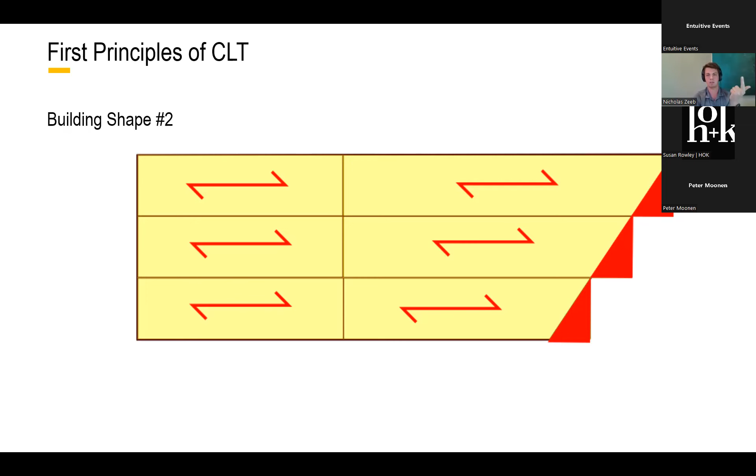Now, effectively, what I'm proposing here is you could have a floor that is sawtooth like that, and it would have a similar embodied carbon for that floor plate. But because we have that diagonal, unless those triangles that are lost can be used for something else, the embodied carbon of the building is going up, the cost of the building is going up, but it's not contributing to the floor area.

So with all that in mind, we took all of those principles that we discussed earlier and we applied them to a project that we built last year, the YW Affordable Housing Solution in Kitchener, Ontario. This was a project that achieved great success, such that our mass timber solution won out as an affordable housing solution over a core slab structural alternative.

Here's an image of the building under construction, almost fully assembled. So we used CLT for the floor and the roof slabs, for the demising walls between the units, the elevator shafts, the stairwells, and the exterior wall panels. The panels you see on the outside of the building are approximately 10 feet wide and 4 stories tall. And we installed those exterior wall panels in only 2 working days.

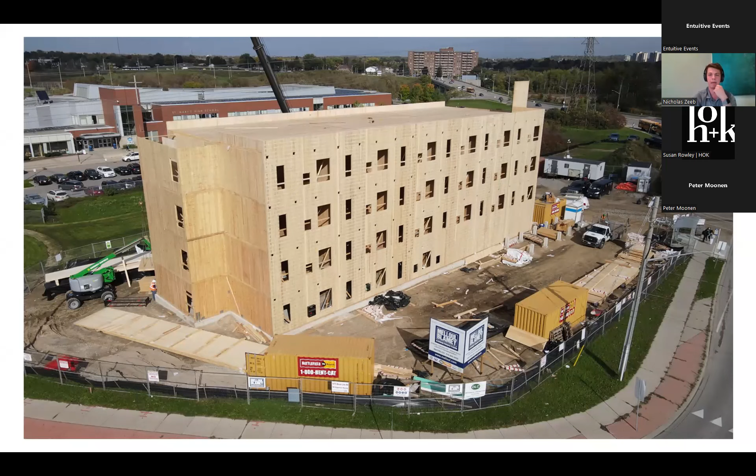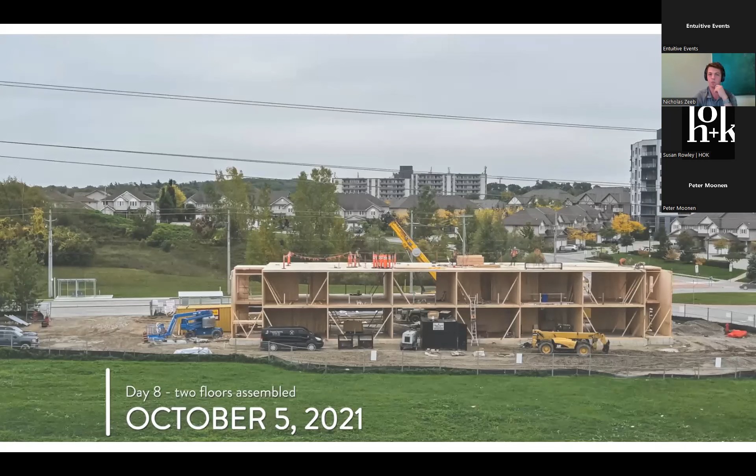Showing a time lapse of the construction here, we got on site day 1 on September 23rd. By 8 working days later, we were on the 2nd floor of the building. And by 20 working days later, the building was fully assembled.

So again, this solution utilized the principles that we described earlier, be it that we considered the manufacturing first principles of CLT to reduce waste. We had a location that was incredibly close to the facility, and all the other principles that we described to be able to bring down the cost of this building such that we were able to be cost competitive while also being sustainable and environmentally friendly.

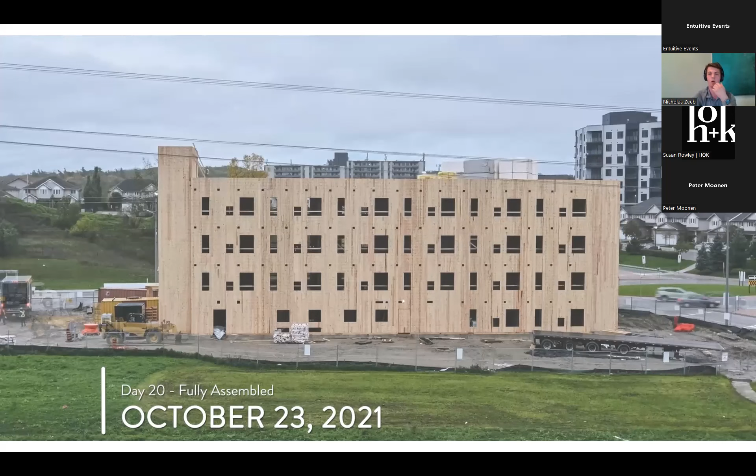And we've now been experimenting with a lot of different versions of the same typology, showing that you can get fairly creative with the building typology as long as you're, again, considering the limitations of CLT, how it's manufactured, and putting all that together to make sure that the building is designed as effectively as possible.